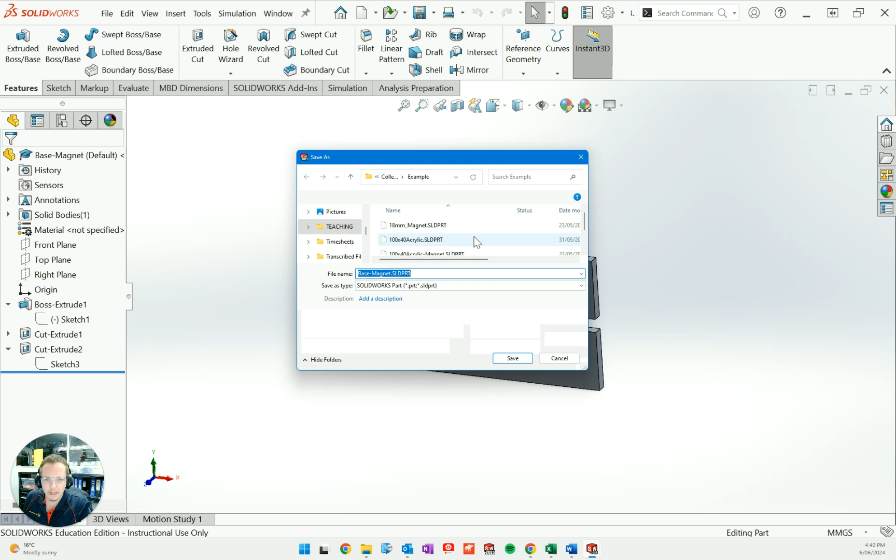So what we need to do is first of all make sure we have this saved as a SolidWorks part. So I'm going to go File, Save As. All right, I do have this saved already. I've called it base magnet and I'm just going to click save. Yes, I'm going to overwrite the part that's already there. And that's my part saved.

Now, we need to save this as a different file type so the laser cutter can read it and cut it out for us. So we need to save this as a DXF file. So I'm going to go File, Save As. And this time, in the same folder that my SolidWorks file is in, I'm going to select Save As Type, and I'm going to change it to DXF. You'll see that I already have it saved as a DXF here, but I'm going to click Save anyway. It's going to ask me if I want to override it. I'm going to say yes.

Okay, now it's good to note that we haven't actually saved it as a DXF file yet. We actually need to do a couple of things before it finalizes its save. So on the left here, we've got this little panel with a couple of settings. Now, what this means is it's looking at what we're looking at here and going, what do we want to export? What does the laser cutter want to read? What lines do we want to cut out?

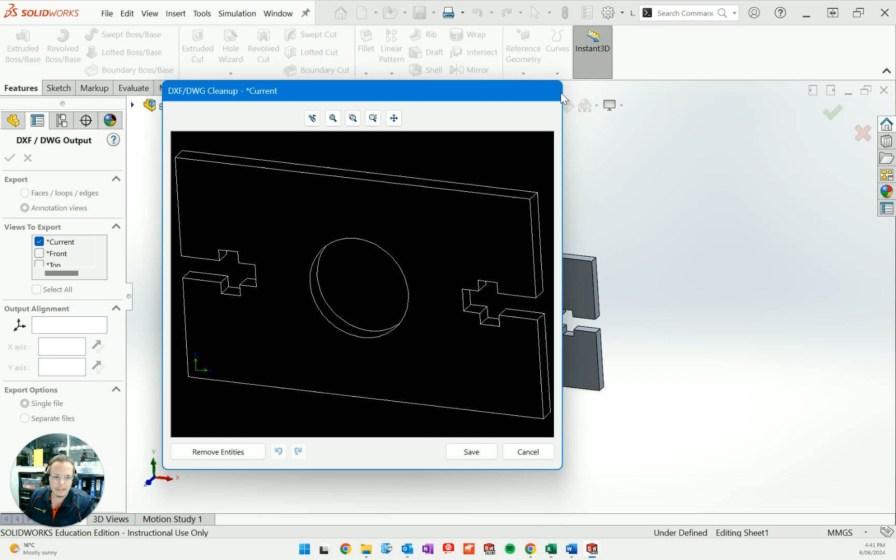If I leave it as it is now and as it's selected current, which is what this is looking at, if I click on the tick, you'll see a little preview window come up. You'll see that it's literally just the outline of what we're looking at here. Now, this isn't what we want to send to the laser cutter, because the laser cutter is going to try and cut out each and every one of these lines. We don't want that. We want a nice flat rectangle with our extra lines down here, all nice and straight. So we're going to click cancel.

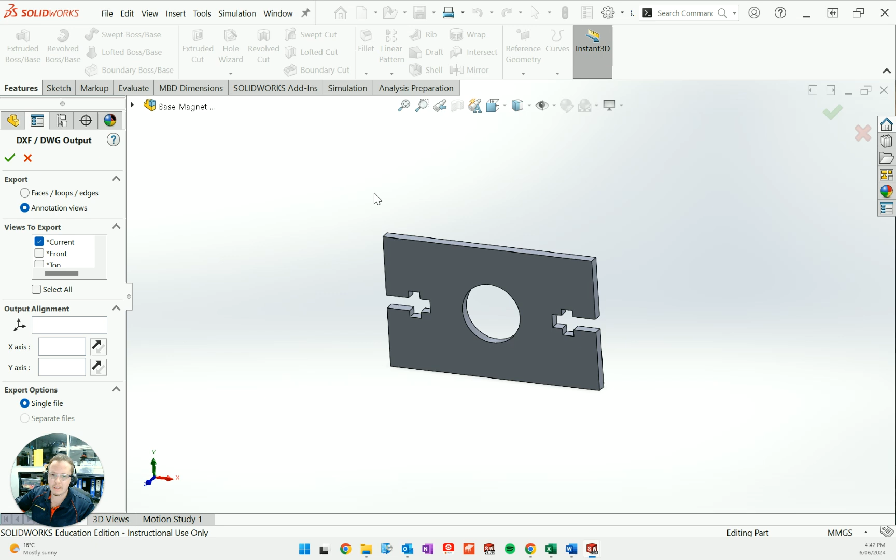And leaving it as current, we want to just have this on the front plane, on the front face. So if you started your sketch on your front face or front plane, you can click Control 1. I've just clicked Control 1, and now it's brought me to my front face. If it doesn't bring you to your front face, you can press the spacebar, rotate around to the face that you want, get close enough and then select it.

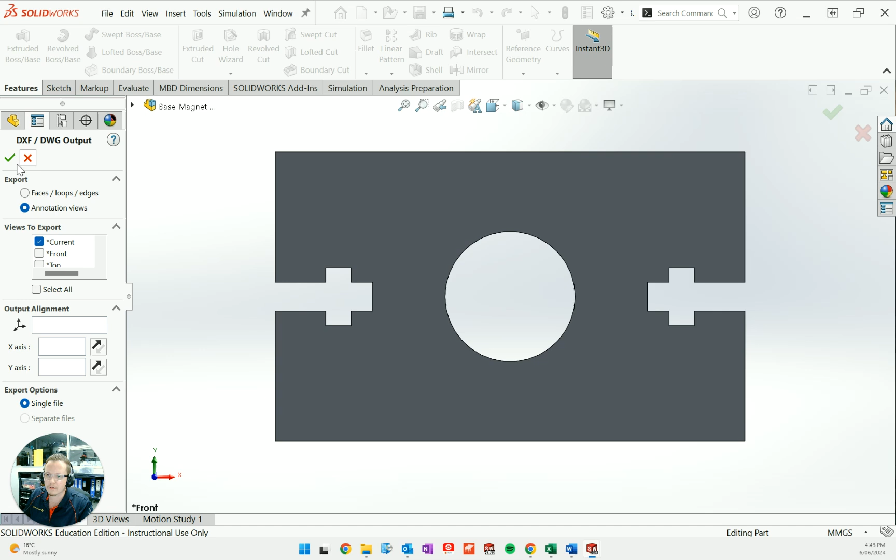And it'll tell you which face it is at the top there. Select it, and then it will bring you to this front or whatever face you need it to be set to. It'll bring it front on so that it's nice and flat for us. Now, looking at our little menu on the side here, leaving it as current, we can click the tick one more time, and it's going to give us our preview, and there's our perfect 2D lined image, so the laser cutter is going to read these lines and we're going to set it to cut out these lines. And this will be the exact measurement of the part that we've made in SolidWorks.

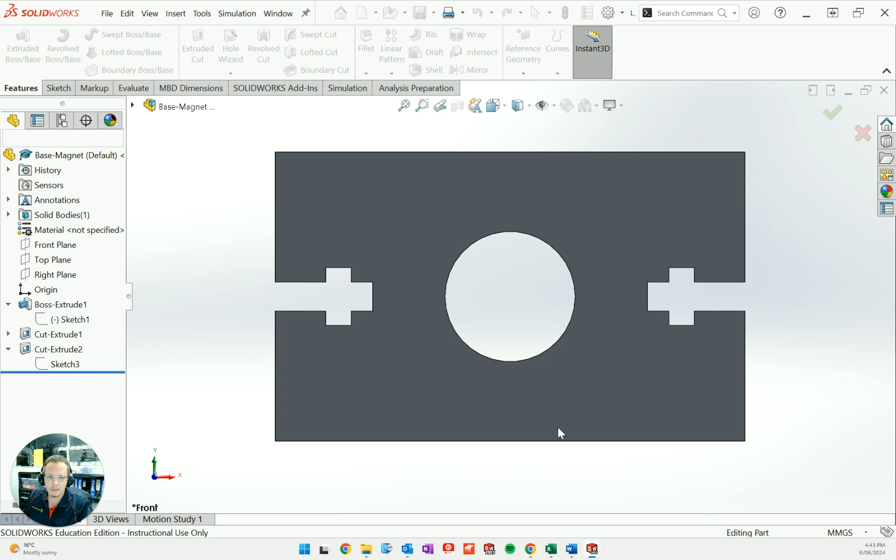So now I'm going to click save, and now it is saved as a DXF file in the same folder that the SolidWorks file is saved in. So navigate to where you've saved this SolidWorks file and you'll find the DXF file saved there as well. And that's the file you want to put onto the USB and take over to the laser cutter.